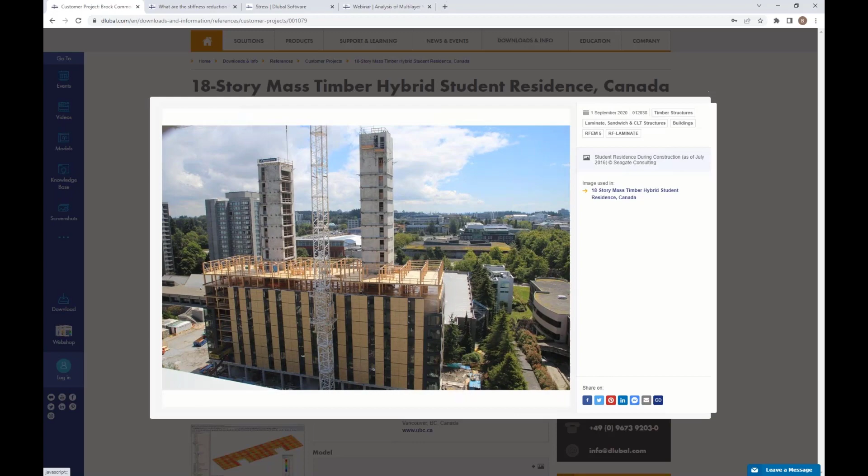Thank you. What I want to show you today is actually separated into two smaller models. The first one is based on a customer project, which we will just model from scratch and design. It's the Brock Commons building, 18 stories and 53 meters high, standing in Vancouver, Canada. It's a perfect structure, and we will design one story of it.

Therefore, we directly go into our new program, RFEM 6, and will create a new position. I don't want to lose too many words about how you arrange models, and we are not doing a theoretical introduction into the design process, but a few words about how the general model is going to be defined and how you can assign it. First of all, we give it a name: webinar CLT 2D plate, for example.

In the second register, we are actually activating the add-ons, or what we want to design. So what do we need to do today? Of course, we want to define a CLT floor. For generating the stiffness, you would need the add-on multi-layer surfaces - it's written in brackets, e.g. laminate and CLT. So it's not only for timber or CLT, it can also be used for glass and several other products like carbon fibers and so on. Wherever you have several layers of material, of any kind, lying one over the other and generating a stiffness from it, this is the add-on you would need in our portfolio.

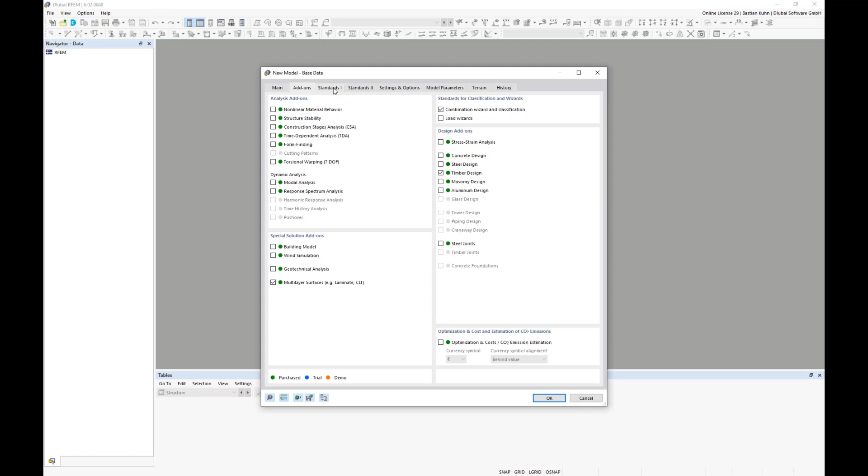We are not concentrating on load design or creation, that's why we switched that off and jump to the third register, standards, as we want to design for timber, for CLT, and we are in Germany here. I'm using the Eurocode with the timber annex. In case I were designing in America, Canada, Switzerland, or elsewhere, I would choose the other standard. I can keep the global national annex, but of course for each country in Europe there are several national annexes you can choose.

In general, what you are doing with these annexes is that you can assign deformation coefficients, the kdef, there. So in this case, I'm designing in moisture class 1 and therefore use kdef 0.6, which is already predefined. But in case I want to use another value, I can for sure choose that there. Okay, timber design, it's the same as what counts for the load generation, and therefore we can skip that now from the explanation.

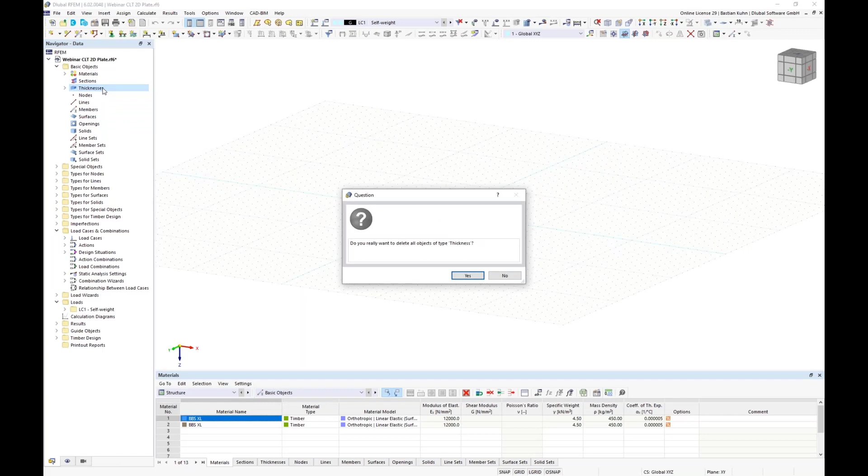Okay, then we are in the screen of RFEM 6 and directly will define the new thickness. Sorry, I wanted to start with a blank sheet, therefore I wanted to delete thickness and material because I want to show you directly what you have to do. So if you go in here and want to define a surface, you at first create a new thickness type here, and because I have activated the add-on Multilayer Surfaces, you have here a thickness type Layers, which we will be using here today.

So when you choose that, you see that thickness and so on can no longer be introduced in here, but a second register is opened where you can define layers. There you can also directly go to the material database and choose an orthotropic material model. And if you go to the library, you can see that we already have a few producers there. So there's Binderholz, Haslacher, KLH, Züblin with the Leno itself, Stora Enso, and so on.

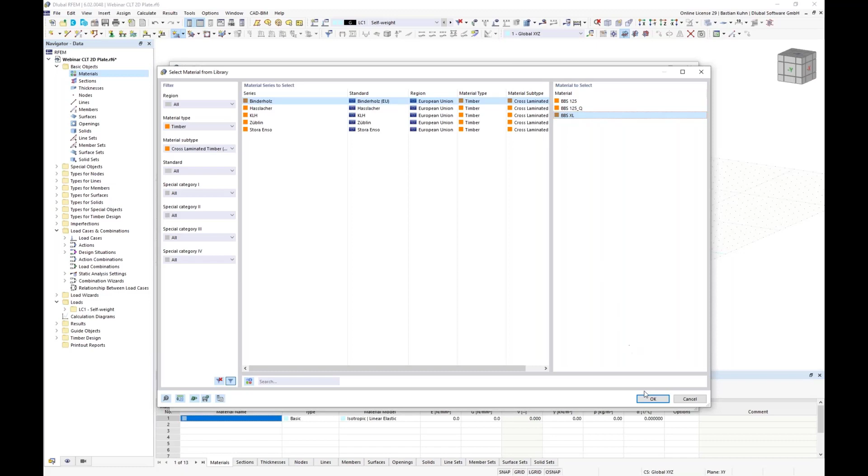I will be choosing directly Binderholz with the BBS XL because I want to show you what exactly this is doing in here, because now I've chosen this material and it took directly from the database the correct strengths which the producer, in this example Binderholz, gave us. Especially the strengths for the shear stress verifications are something where you do not have any values from the standard. So if I had chosen an ordinary C24 material, I would not even have this strength here and would have to assign them.

Okay, so now this is predefined. It also made a stiffness of 12,000 Newton per square millimeter in the X direction, and in the Y direction it is 0. I said it already, we cannot give you today a theoretical introduction into our design. Therefore, during the modeling process, I will show you our homepage where you can take a look into the manual, and we also offer special trainings for that. But now, in X direction, it's 12,000 Newton per square millimeter, and in Y direction, for one layer, we have a value of 0.

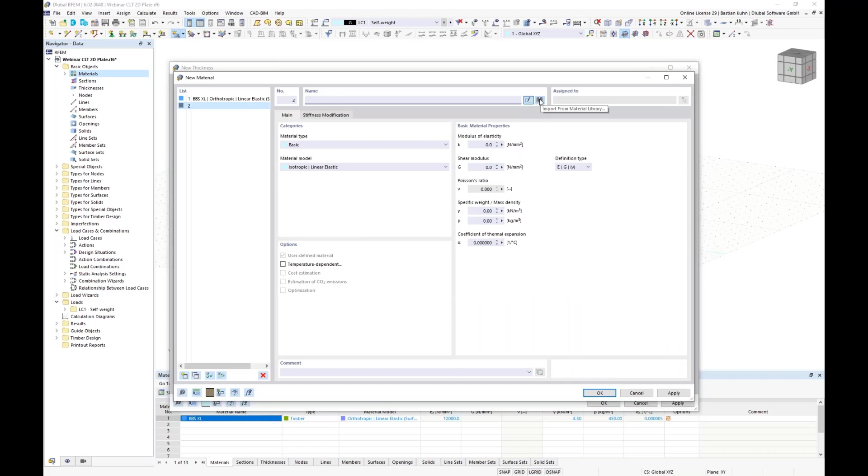For graphical reasons, I'm now choosing the same material once again. So go directly back to the database, choose this material here as well, and give it a red color, because I like the difference between red and blue. Here I'm using exactly the same material model. There's no difference in between, so the material values are the same. As I said, it's just for graphical reasons. You see now that it's red, and in the rendered model afterwards it will also be red and blue. Just a personal point.

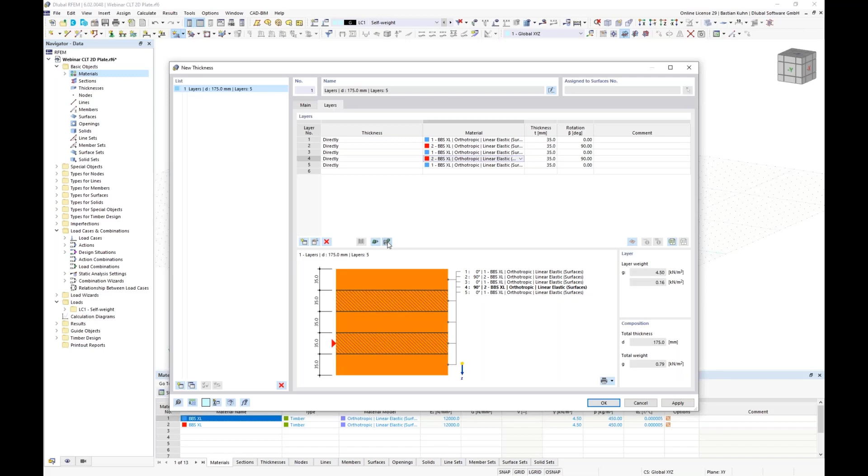You can also save this setup to a database. So of course, we could use it for the second model that we want to create today. Therefore, we name it now Webinar CLT or whatever name you want. And then later on, we can load it from a template in here.

What I missed now is the stiffness reduction, because when we are calculating with the shear stiff transfer of the load, we have to reduce the shear stiffness in some parts. So the drilling stiffness K33 and also the in-plane shear stiffness K88. I will also show you a link later on where this is described in more detail.

Here on the bottom of the third register that has now opened, I have options especially for CLT design. I could use here glue at narrow sides. The reason for this is that most of the producers are gluing their CLT on the narrow sides, at least for the production process. They do not assign it for the stiffness, because the EY, you saw it, is still 0 there, but they are using a little bit higher shear strengths. But stiffness, because of cracks in the boards, they are not increasing it or regarding it.

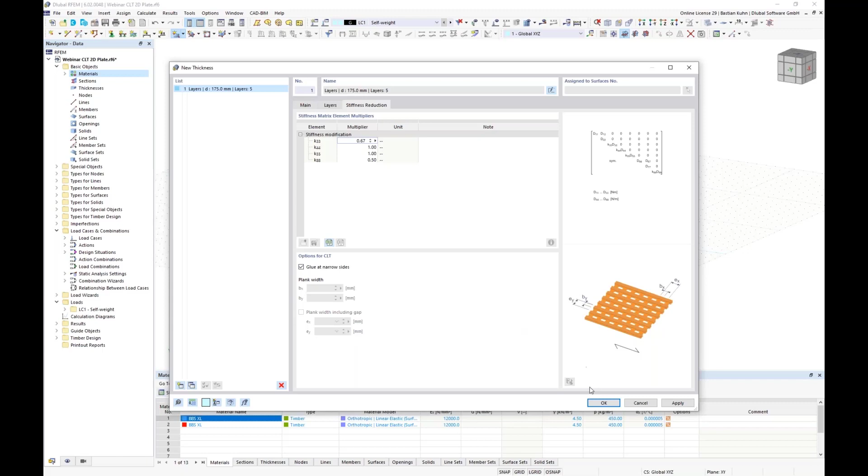So therefore, in the first model, I will glue it at the narrow sides, and in the second model, I will show you the difference, what happens when you switch it on or off. But for now, we're using it glued. Say okay, and one more time okay, and now we are in the screen.

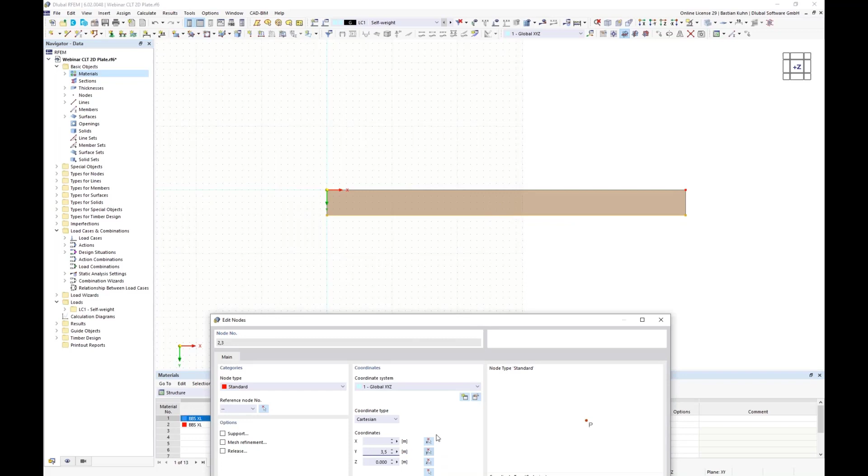Use the origin of 0, 0, and then we want a width of 55 meters, and the height of each plate should be 3.5 meters. I know that it's not possible to produce a 55 meter long board, but there are options to calculate such things also stiff for the rotation. And I want to have several boards with a width of 3.5 meters in the Y direction, and that's where the higher force should be regarded.

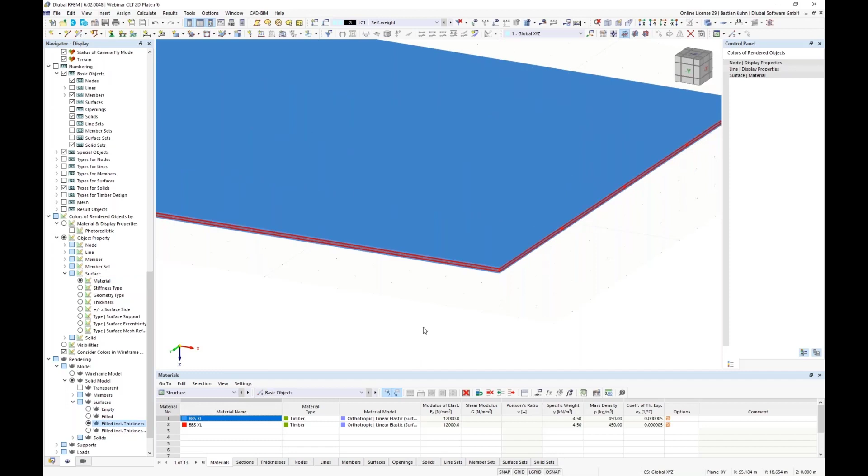I'm using the dynamical size of the grid and will now copy the system 3 times into the Y direction with a value of 3.5 meters. So then it's here, and I want to show you now why I used the rendering. We switch to the view screen and say surface. Now you cannot see it. Sorry, I have to go to model, solid model, surface, filled including thickness. And now you can see each layer, and it becomes much better visible how the layers are oriented.

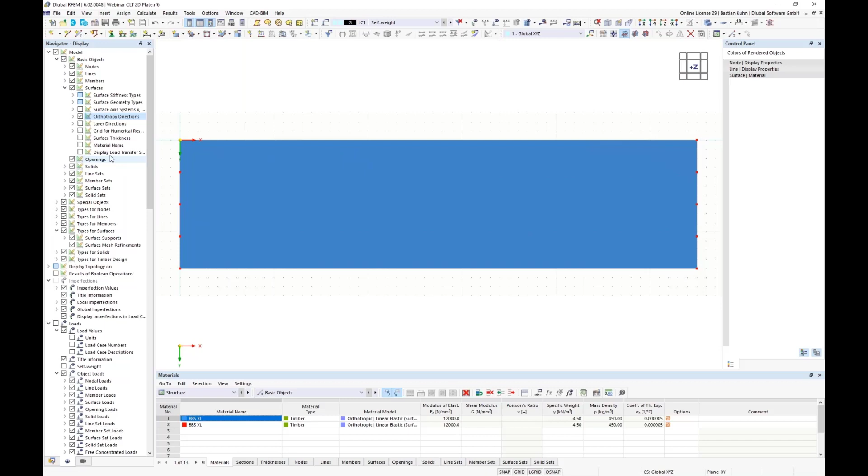We have implemented in the surfaces so-called orthotropy directions, because the material model that I explained is an orthotropic material. But if you switch that on, you see nothing happening. Why is it like this? Because now the layers are oriented in 0 and 90 degrees. If you want to see how they are oriented, first you have to switch off the rendering, but then you can see how they are oriented.

And if you switch the indices on, you see that the layers 1, 3, and 5 are oriented into X direction, and the layers 2 and 4 are oriented in the Y direction. So my main stiffness is in global X direction. That is what is important. Okay, so that's the model. I can now switch that off and divide these 2 lines by 3 nodes, because these are going to be my stiffening cores in the center. They are made from concrete, and that's how it was assembled in the building in 2017.

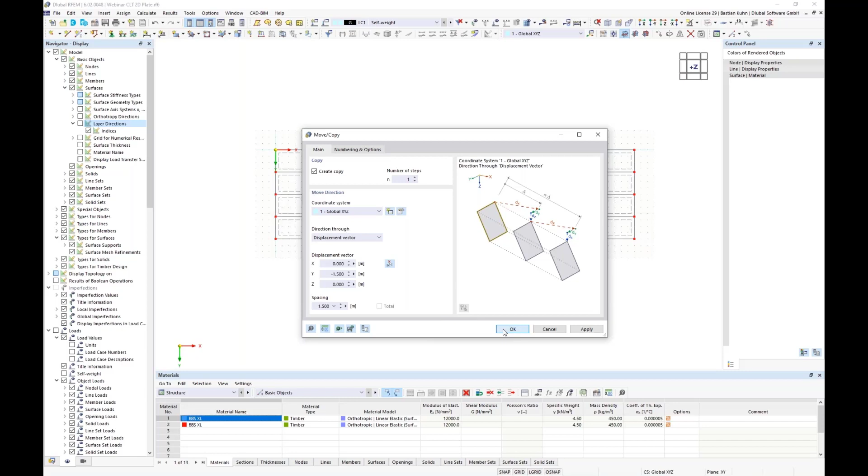They have a width of 6 meters, and the second core is at an origin of, let me take a look, 37 meters. I'm not using the exact values from the building, but just to have it close to the structure. These 3 nodes I will copy 1 time in minus 1.5 meters. Say okay, and then I will draw a few lines here and there. And this one I will copy via drag and drop onto the right side. I will connect the lines, and then it's okay.

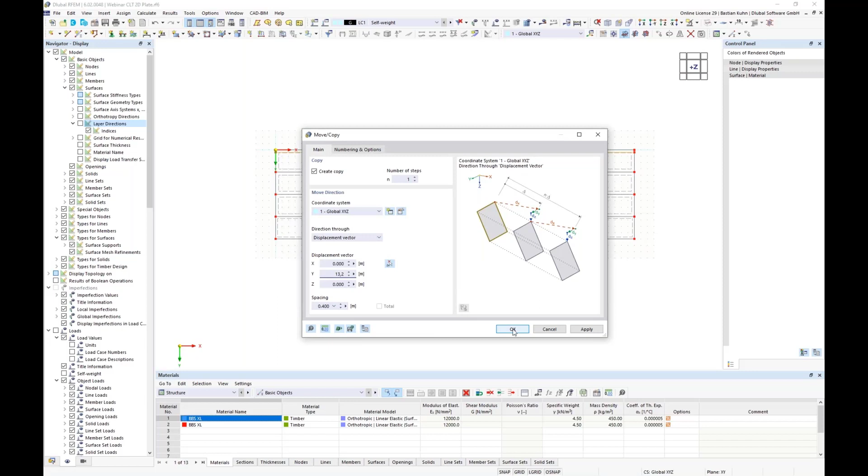And then a very nice function is, if you right click in here, you can divide the surfaces by integrating lines, and now you can just delete the surfaces which we do not need. The facade is running on the outside of the structure, and the supports are lying on the inside. Therefore, we are copying the outer line now by 0.4 meters in the Y direction, and this one also on 13.2 meters, also with 1 copy.

I will take the inner lines, and before I do that, I have to look for the origin of these lines, which also works via the display navigator lines, line orientation. And now you see that this line is not in the same orientation. Therefore, I will use reverse line orientation in here.

And now that I'm just in this dialog, I can also take a look if my line axis system is similar. Of course, now that I changed it, it is important later on in order to define the slip in between surface number 1, 2, and so on. I will explain that when I'm doing that. But first of all, for the supports, we want to divide the lines in here.

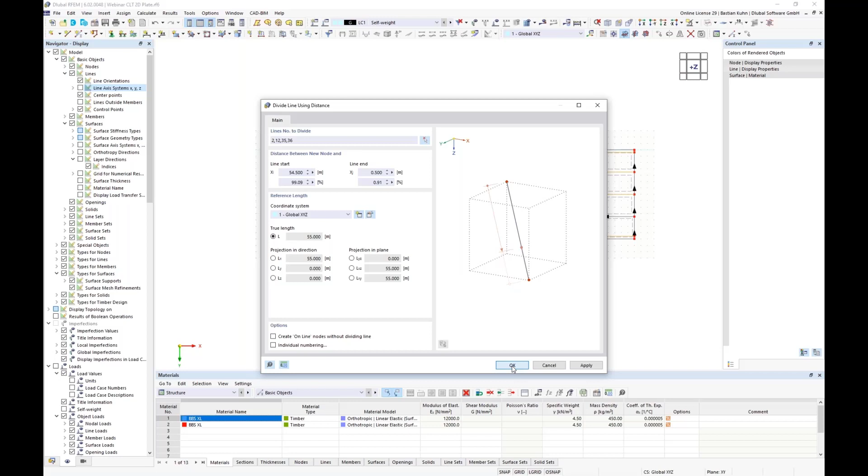Say, okay, divide line distance from the end is 50 centimeters. Still forgot one. Sorry for that. Divide line with a distance at the end 0.5. Okay, it's not happening again because I have to do it here as well. So divide distance and then at the start also 50 centimeters.

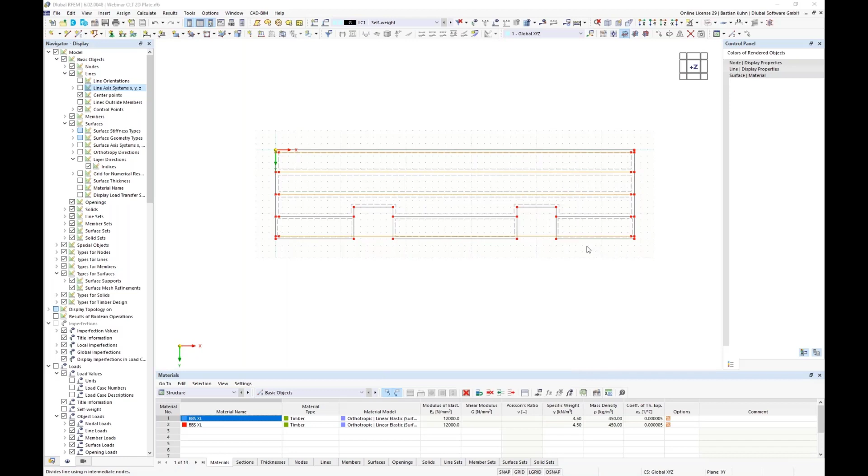Okay, now this is how the supports will be running, and of course those are not enough supports. We need more columns in the structure. We have now also to divide the line by n intermediate nodes, and what's also a very nice function in RFEM 6, or which has been improved compared to RFEM 5, is that you can now create nodes on a line without dividing it. You could do that in RFEM 5 as well. That's not completely true what I'm saying here, but there are more options for it right now.

So I'm copying it 11 times, I think. Yep. 11 times without dividing it. Yeah, that's all. Sorry. Okay. Now the structure is nearly there. I have to just interconnect that. Actually, that's not really necessary. I could also have left it like this.

And for the inner line in here, of course, you also want to have the nodes copied to there. The shift function is deselecting what you do not want to copy. And now I'm doing one copy of a value of minus 3.1 meters, and now they are there.

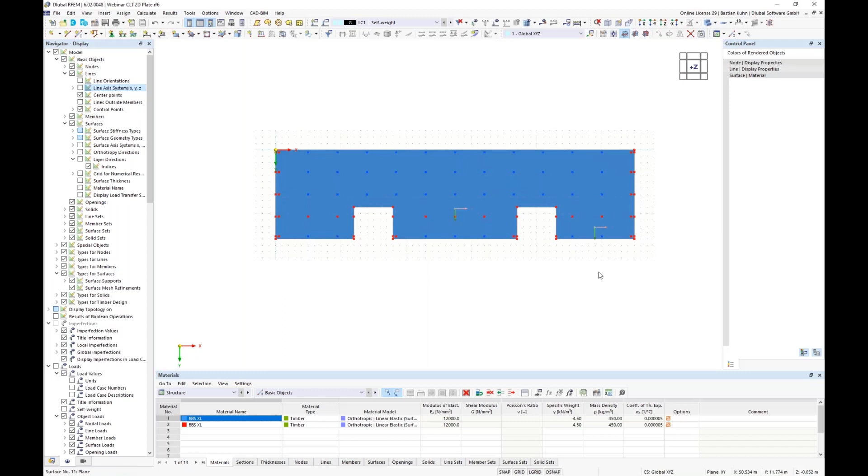Okay, now I introduced it already several times, and the question is, well, how can I now define a slip in between this structure in here? And that would be done with a line hinge. A line hinge is also improved very well in RFEM 6. If you remember RFEM 5, you had to do a lot of line hinges on such a structure, and now it is possible to do it only for one object.

But still, you would have to define a slip here in UX and UY direction, and therefore it's the first time for this presentation I want to jump out a little bit and show you a very, very simple calculation in Excel. I just want you to know how I get this value and not grab it from heaven or somewhere. I'm calculating a slip in between the two plates in here based on some very simple equations.

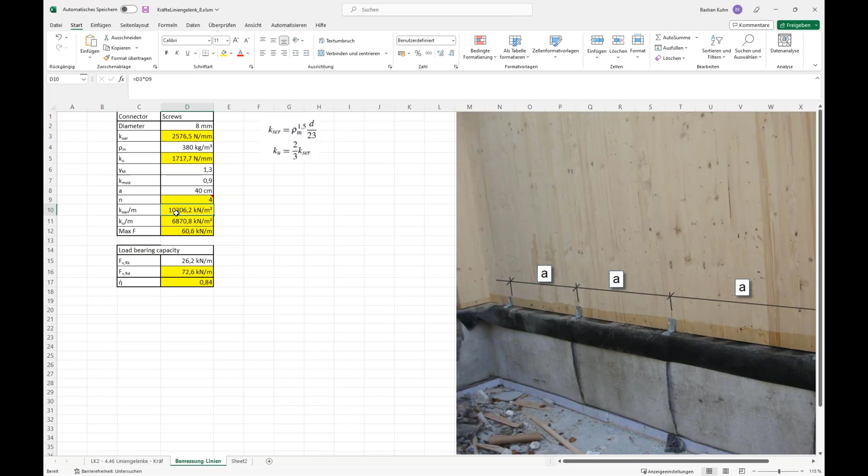Okay, sorry for this little excursion, but, as I said, I wanted not just to present it as heaven sent. And if you have this value for the slip modulus, you can go inside our global parameters and name it, in this case, K ser. And in unit groups, you already have a lot of values that you could use. And we want to have line spring constant, and this gives you this value in here. Okay, and insert, and now it's there.

So that is now not really a big step, because if you only have this, what does it bring you? Because now you design the structure and you find out, okay, 3 connectors, that's not enough. I need to have 4. I need to have it more stiff. Then you always have to jump inside here and define it. And also for your documentation, the printout report, you have like nothing.

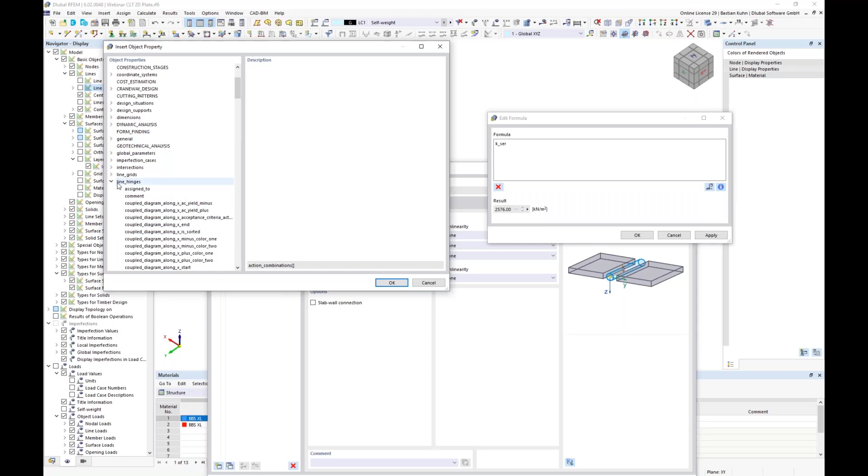So how can you improve that? If you go to this info box in here, you see there's the option to insert object properties. And there are now also very, very many options that you can do. But we just want the simplest one of it, line hinges and comment. Say okay. And you see right now, it's a simple JavaScript function that I'm using in here.

But it has an intelligence behind, because it already tells me, okay, what you're doing here is an error. Something is wrong. And what is wrong? Okay, I need to tell the software what object I want to assign the comment to. So in this case, that's the object 1. I just have to type it here. You see it here in the list on the left side. And I forgot the addition in here. So, and now you see, well, the value is still 0, but I have something in here.

For my documentation, I'm using this little slice in here. That's just something you need to Google and will find out directly. So if you say, okay, nothing changed, that's a little bit annoying. Why is it not sending the value that I want? Because you have to define it here in the comment. And if you say 3 connectors, or you can also say 3 screws or whatever it is, first of all, this comment is taken to the printout report. I will show you after we did the design.

And now if you find out during the process, okay, 3 is not enough, I need to do 4, or it just has to be stiffer, you can just define it here, and it's changed in real time. Well, of course, right now I know 3 is more than enough for this structure, because the horizontal load that I'm assigning here today is not that big. But that's something you will always find out during the design process.

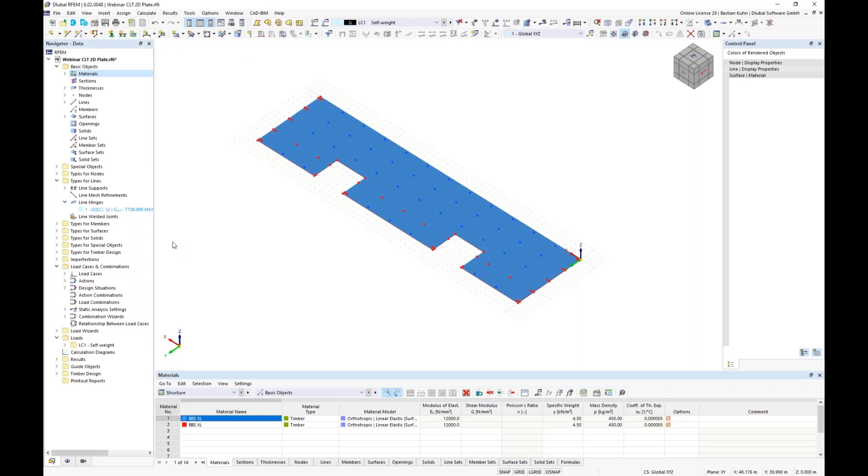If you jump into types for lines, line hinge, it gives me the opportunity to show you the advantage of it, because in RFEM 5, you would now have to open the dialog once again and also define the line hinge once again. But as this is an object now here, I do not have to do that, and can now do it correctly and choose the surface and assign it to this line, this line, this line. So wherever I'm assigning it, I'm defining a slip. So in between this plate and this plate a slip is defined, and this plate and this plate.

And now a slip is missing between this plate and this plate. And once again, back in RFEM 5, you would have to define the whole stuff once again. But in here, I just can click there, and it's absolutely no deal. So that's, to me, a big, big advantage of the new workflow.

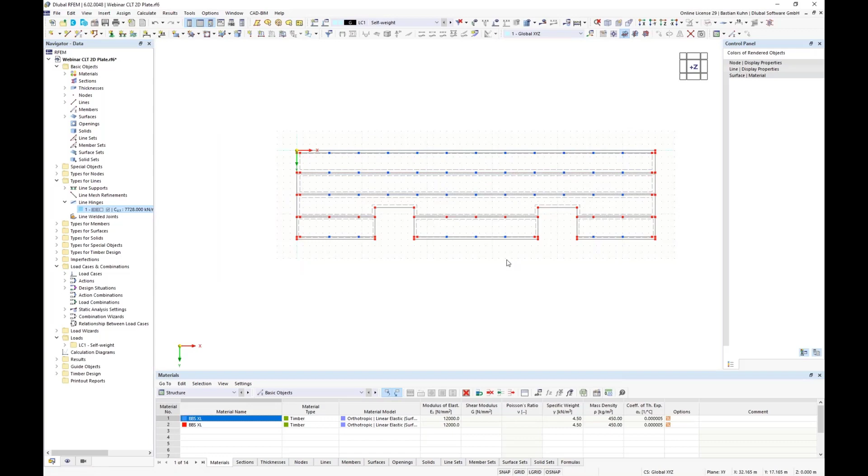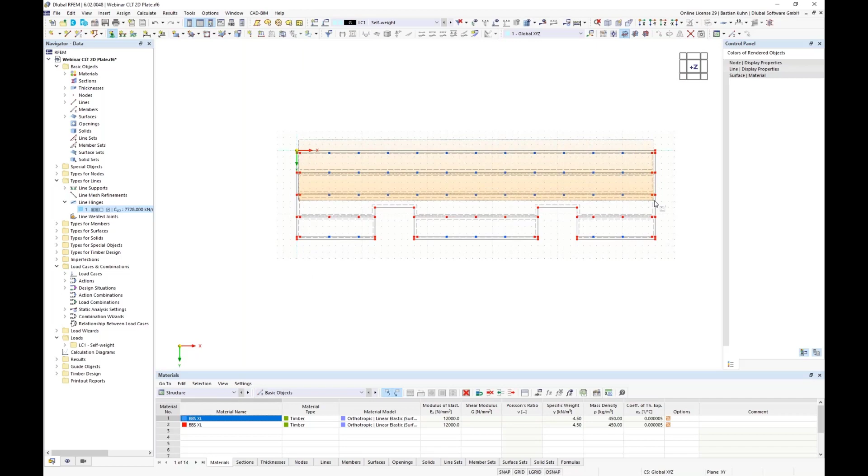Okay, it's a little bit small. Maybe I will just increase the size a little bit just to see it in here, and go actually in Z direction again. That's now defined, and I can define the supports that represent the columns underneath. They are very simple. They are just using force in UZ direction and nothing else. Say okay, and assign it in here and in there and there and there.

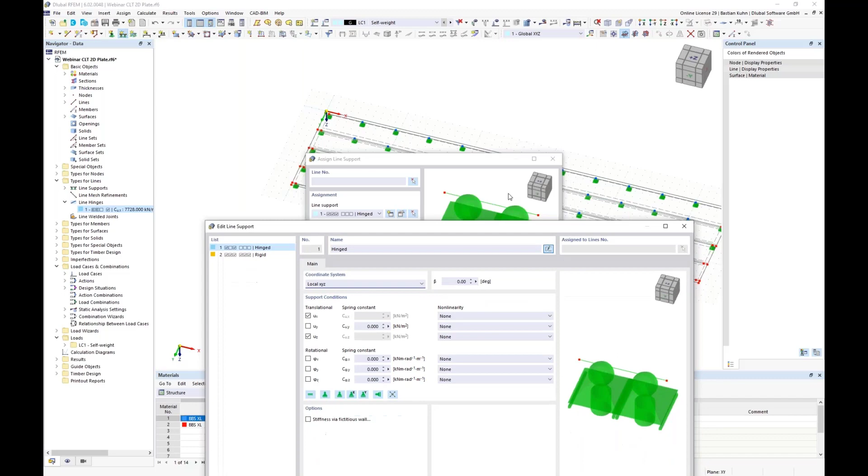That's also, to me at least, a little bit small, and we can maybe just increase it a little bit. Okay. What else do we need? In this case, when there's a horizontal force, it will just move away, and we need to define the line supports from the core, and that would work via line supports, define or edit the existing ones, and we use actually the same intelligence here, but for local systems. And because we want the force just to act in the longitudinal direction of the line, I will just release UX, or just give the slip to UX.

I will complete the release. That's how I want to do it. And then I'm using the same like before, using K ser. Do not make the mistake from before. And now if you go in here, it's obviously not line hinge what we want to do now, but line supports. And there's also just the simplest function comment.

You see in here, you can do a whole bunch of stuff with this. So you can have diagrams with forces coming from other directions than UX and so on. That's all included in here. But yeah, once again, we use the simplest one. So with line support 1 point, same function like before, 0.1 and this, and no error, and then we just

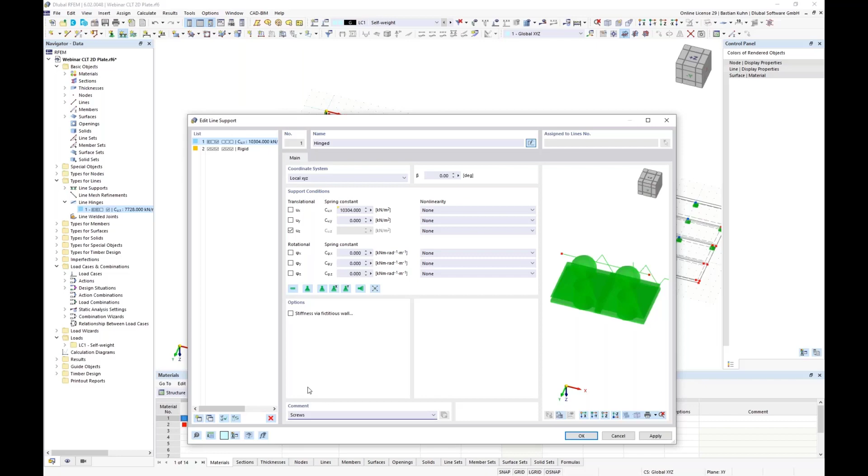type it here, say, what did we write? I forgot it. 3 screws, I think. And now we have it here. Yeah, works the same way. Yeah, trust me, it is like this. All right, 3, this. Okay. But we need to assign it to the lines. That I should not forget.

So where do we want it? There, and there. And of course there, and there. So the model is now already there. Maybe we want to have some dimensions for it as well, just to have it a little bit

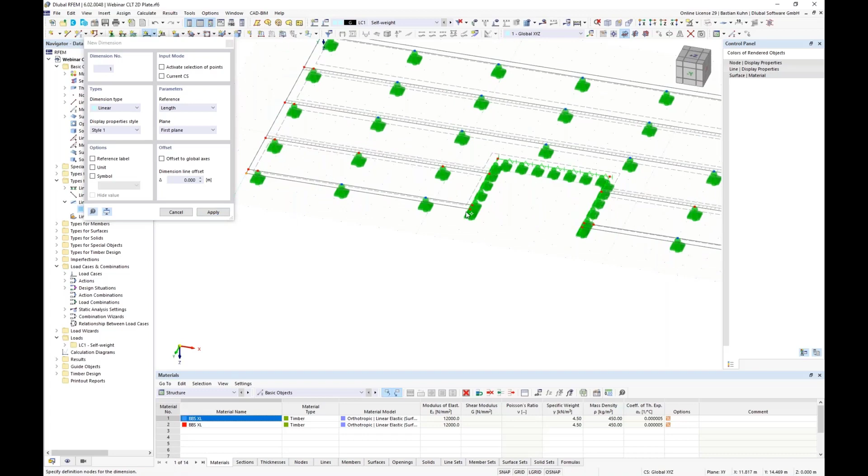nicer. And maybe we are actually directly starting the printout report, because there's something quite nice in the new RFEM 6 that I want to show you once we have the dimensioning ready. So okay, sorry, maybe you would do it differently when you are making the design of it, but for this I think it is now all right.

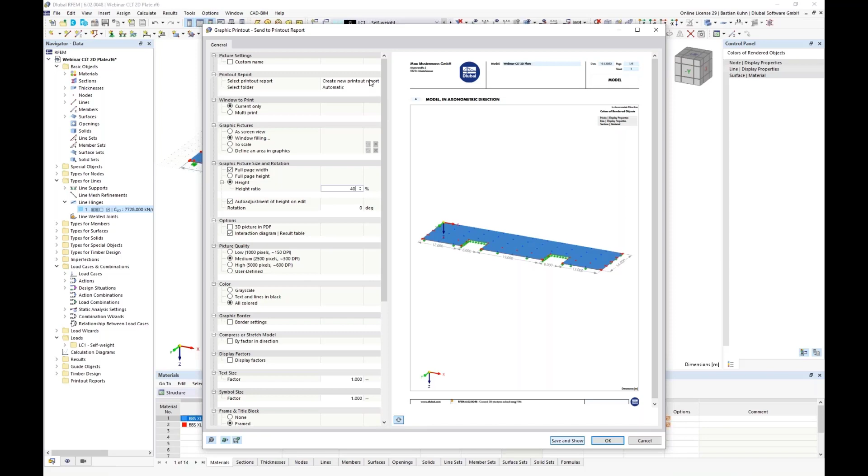And we print this graphic to the printout report, because in RFEM 6 it is possible to have the printout report opened when you are working on the model. And we will do that. We will maybe use it window filling, and maybe not, we take maybe 40% of the height. Save and show. I did not choose a printout report. Actually, I should have selected the printout report in here.

Here. So, and it works in the same way like the material database before. You have here templates, what you can choose. And I actually have created one for today's webinar especially, where I selected and deselected a whole bunch of stuff. I think we will now assign it and then go back to the design process.

All right, it's generating it. Gives me time to drink coffee, a small one. Okay, now it's there.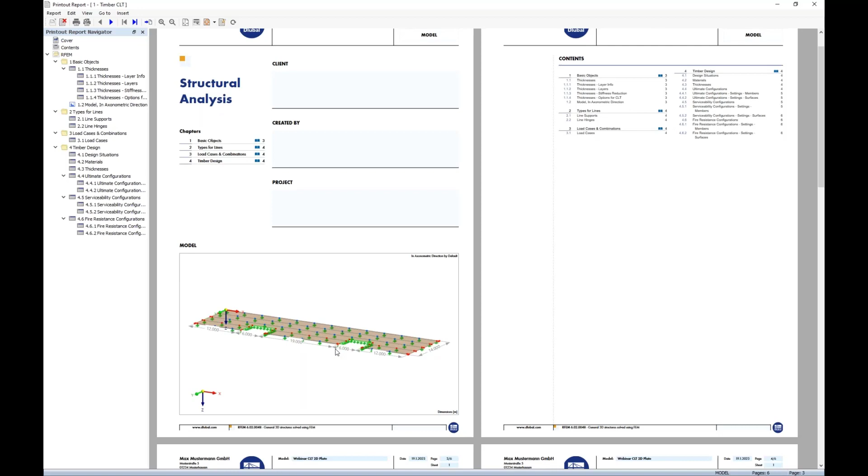Actually, I could have opened it, but we're not doing a webinar about the printout report today, but of course I want to show you what kind of points you can implement in there for CLT or for timber design in general. Okay, so here's now the model, and that's it so far. And we go back to the design process and introduce the load. Deactivate all dimensions, because I don't want to see them any longer.

And introduce the load. So first of all, we're doing a horizontal force just to have a deformation in Y direction of 1 kilonewton per meter. If you have looked at the building, it is standing in one of the highest earthquake areas around the world, so there's probably more force than 1 kilonewton per meter. Also from wind, there's probably more force. But yeah, just maybe we are in the ground floor here and just have some small force.

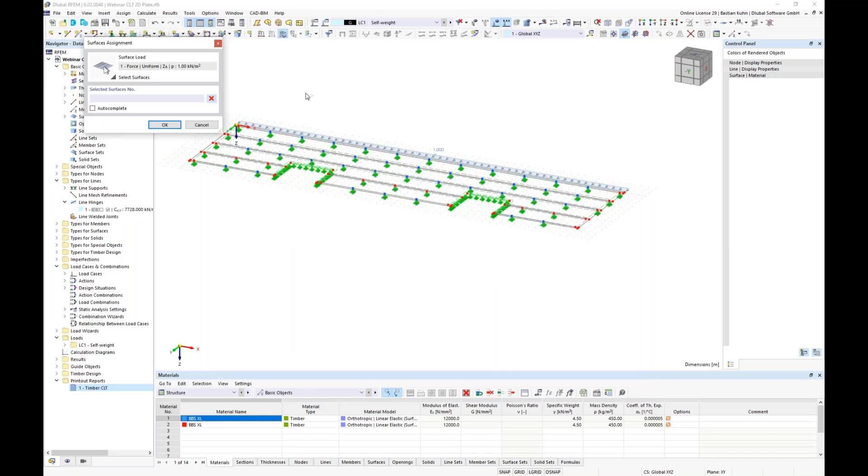Yeah, we also take a small value in load case 1 from self-weight and say okay, we have that here. And now we define for each plate a live load. So this will be 5 times. Say okay, and now also one of the advantages if you compare it with RFEM 5, and yeah, I worked long years with RFEM 5, I'm still comparing it. But if you are new, you do not have to compare it.

In RFEM 5, you would have to define the surface on load case 2, say okay, leave the dialog, and then choose the second, or in this case the third load case, assign it there, and so on. This is, as you see in here, also no longer necessary. All right. And last but not least, this one.

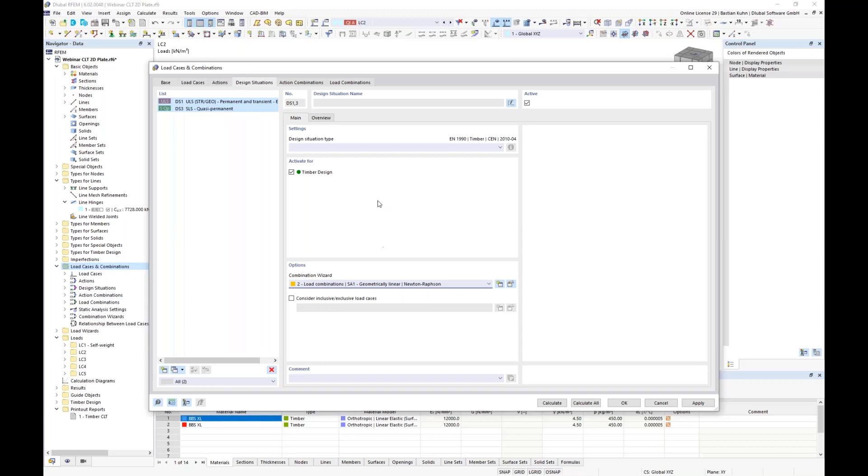Okay, so we can now also control if we did that all correctly. It's all correctly. And go into the load cases and combinations. We're choosing timber here as a standard group, and for the design situation I would just use quasi-permanent. The other ones I'm not interested in, and I'm calculating according to first order theory and automatically creating my combinations for that.

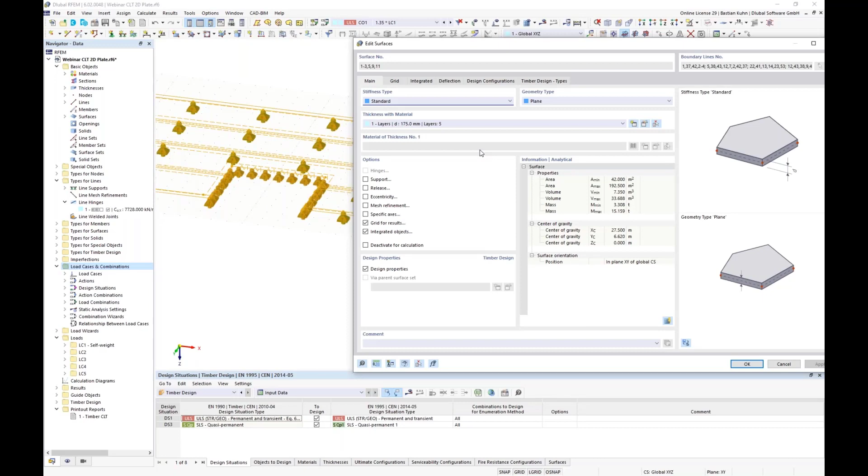And now they are here, say okay. Now I could have started with the design in the add-on timber design because I have activated that in the basic data, but I have to show you the objects that you can or should take care of. If you compare that with RFEM 5, there you have the design add-ons Laminate and Timber Pro, and all the things you defined in these add-ons are now moved in RFEM 6 into the objects. In this case, we are designing surfaces, so you define it in the surface.

First of all, if you look for the deflection, you can choose deformed or undeformed system, but that's not what I'm up to. I want to show you a plate is always a little bit problematic when it comes to having no clear deformation, where you should consider a reference length too.

So the distance between this support here on my node and this is actually 4.5 meters, if you remember what I did by copying them. But how do you want to regard it with this other side? Therefore I choose 5 meters because I'm choosing the difference between this point here, and you cannot see it now, but the other point there. So to me, that is now on the safe side. And if deformation gives me problems, I anyway would have to do a more detailed deflection analysis. Okay, that's, I hope, explaining it a little bit.

Ultimate limit state configurations. We have a combination for ultimate limit state configuration, and therefore, of course, we also have to look for the objects. The first two registers are for members, and the third one is for surfaces.

Maybe most interesting for the designer is that now for CLT, it's also possible to consider a system strength factor. So that would be possible in here, and then you could increase it to 1.1, for example. The other ones are not important for surfaces, and therefore I'm not explaining them.

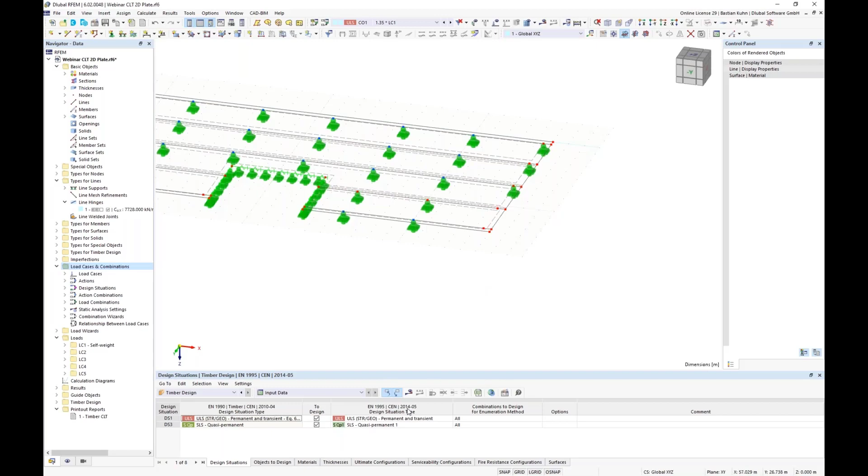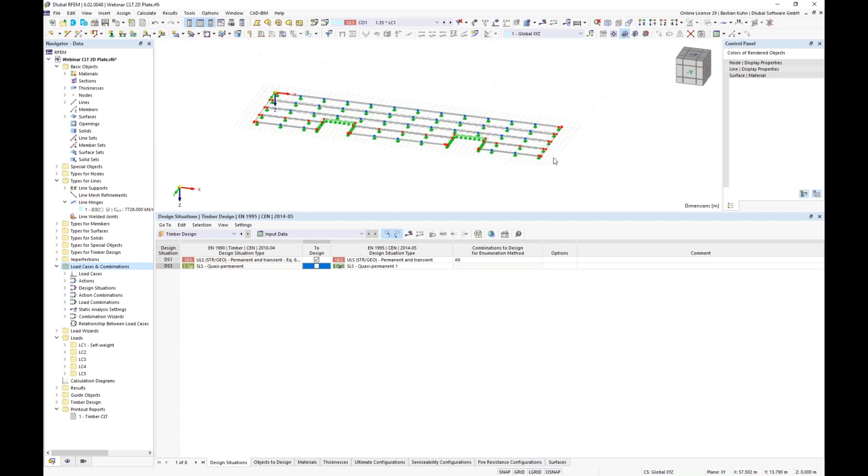Okay, so that's now done. Enough explanation. In the first step, I can also just calculate the ultimate limit state, because serviceability state I could design when I'm sure that everything else is working correctly. Actually, let's see what I missed here - there's a support missing there and also there. Yeah, maybe do some checking before we start, but the rest looks great.

And I will start the design process and will give you small explanations about how the stiffness is generated and what is actually done in there. That's what I wanted to show you right away.

Okay, that's opening now on the other screen. Ta-ta! Hold on. Oh, that's confusing me. I hope you see it now. Can you see it now?

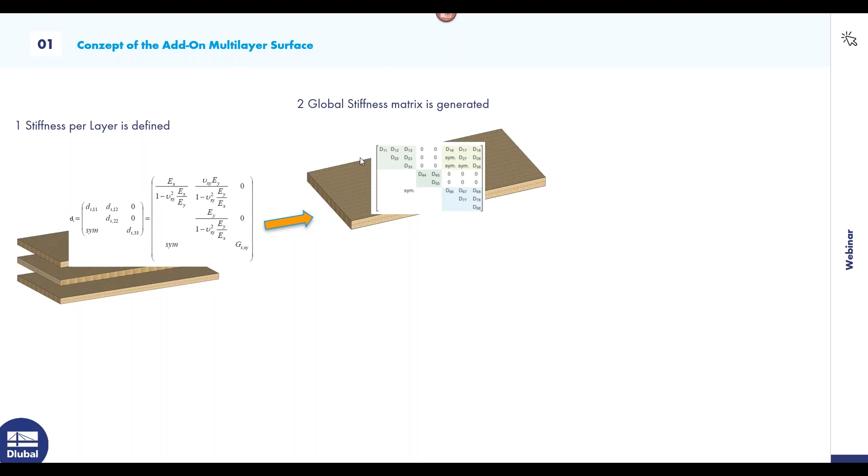If you remember how we introduced the layers, just a small theoretical explanation: we defined a stiffness of EX and EY, a Poisson's ratio, and a shear modulus, and that is now defined in every layer. From each layer, we calculate a global stiffness matrix, which is exported into RFEM. In RFEM, we calculate deformations, stresses, and inner forces on one plate, not on the whole layers, but on one plate, and these inner forces are then transferred into every layer. That's the theory behind that.

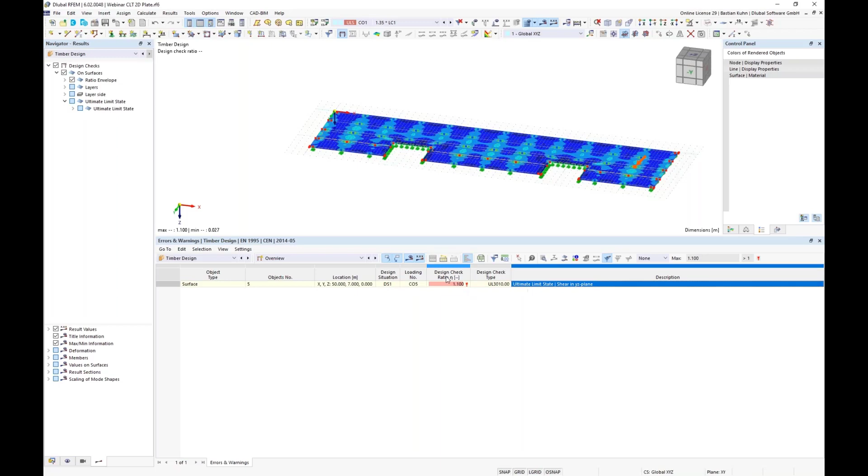Okay, so you see we have now an overloading, which is not the desired behavior because we want to be green and we want to be smaller than 1. But if you look into the details, you can see that the overloading is just in a very small spot here. I can actually switch off the nodal supports.

They are not necessary to me here anymore. Okay, and if you realize that in reality there's not a needle standing underneath this point, but a column with a diameter of, let's say, 40 centimeters or something else, it's obvious that you should not take the force at this spot, but somewhere outside. And I will show you how to do that.

In the literature, you will find this described as a so-called punch-through verification. But before we do that, we go and take a look first into the verification itself. Via double click, we go into the details of it. You see now that in RFEM 6 we have quite nice formulas or equations shown here.

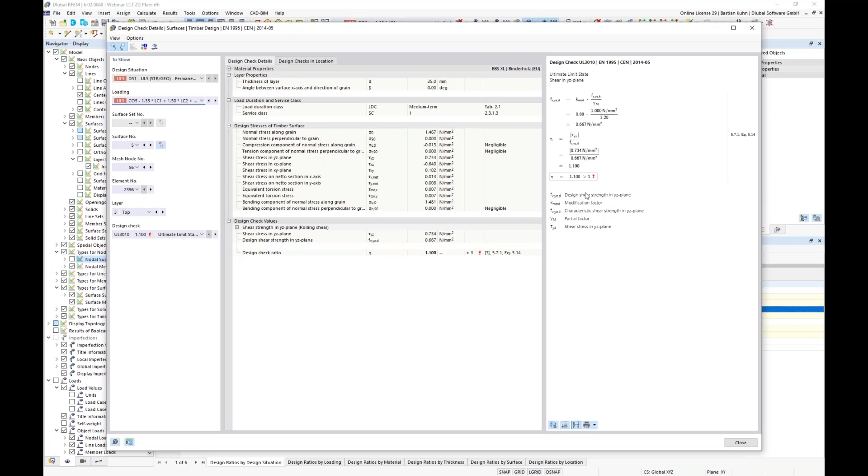They are also filled with values, so you have the shear strength shown here. You have the option to take a look at the ratio over the section itself, or you see here now the several layers that we have defined. You can switch it to stress and take a look into it. So sigma x, the bending stress, you see that where you have high stiffness and high loading, you have a higher stress.

So that can all be compared here. And of course we also want to take a look at the shear stress, and they are usually in the center of your section. That's the same for beams, counts for plates as well.

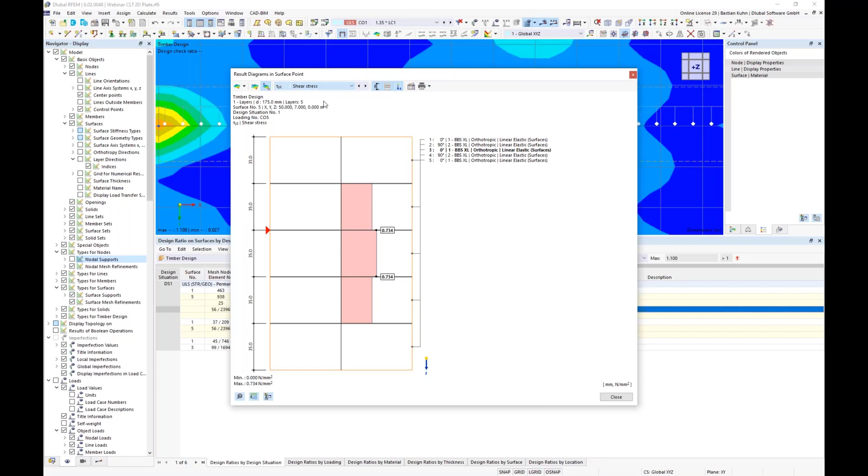Okay, you could also print such things, no, maybe not this one, but maybe this one into the printout report. It's opened on the back, so we can just take it like this, maybe a smaller height. Actually that's okay, so we just say okay, and then it's already in the printout report, and I do not have to take a look at that. We will do that later on. Say close, or I could have also left it open, it does not really matter.

What else is new and possible, and much nicer than it was in RFEM 5? If you go to the result navigator here, you can see that first of all you have now a ratio envelope of all stresses that are here. You have them here and can print them to the protocol directly, or use them for your analysis as well.

You can separate between several stresses, and also between several layer sides, for example top, middle, and bottom. Here I can choose the layer. So for shear, you would probably use one of the inner ones, and for bending, you would probably use the outer ones. That's the first nice function.

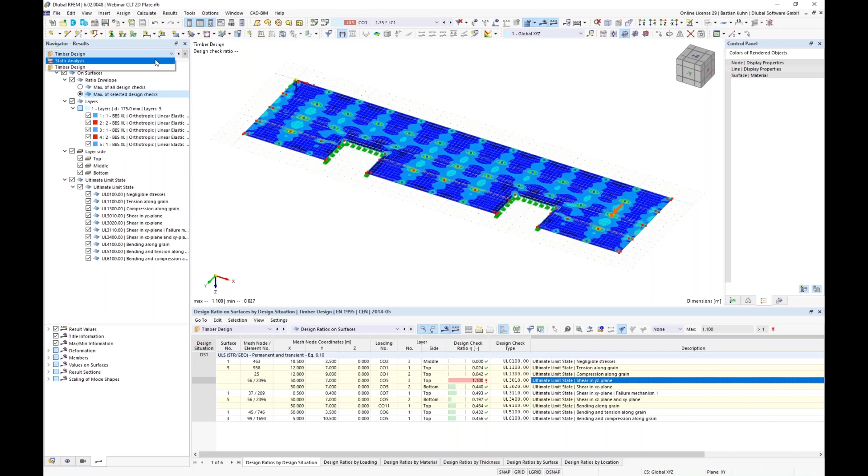If we jump back to the static analysis itself, for the connection design, we have, first of all, when you go to the static analysis, you can see the global deformation and compare it just to get a feeling of what's going on here. You could also here for each layer take a look at your stresses and also your strains. That's for some cases quite interesting, I think.

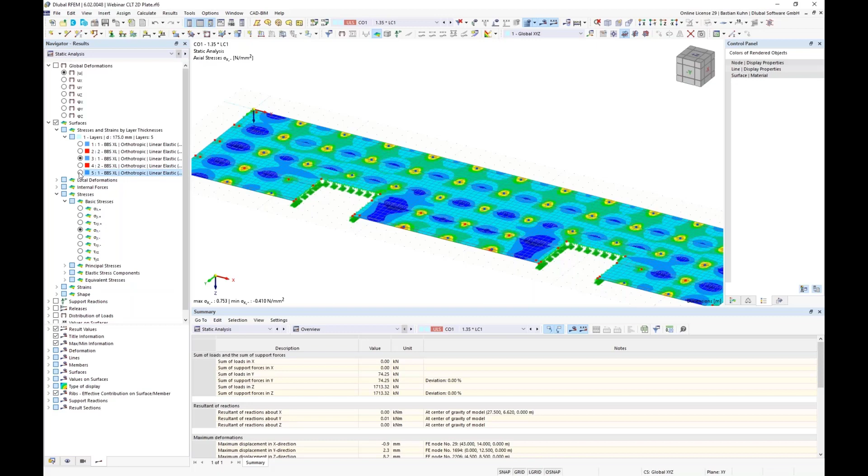If you compare sigma x on the negative side of the surface, you see there is a value on the top of 3.8 here as a maximum, and if you go to the middle, it's actually quite low. If you go to the bottom of your section and choose sigma x on the positive side, it gives you the same value as you had for the top side. So that's also something you could use for your analysis.

Going on with what I said, first of all we want to look at static analysis for the connection design, and therefore we have options here. First of all, the more simple verification of the connection is in the line support, because there we just have a slip defined in x direction. So this is the force you need to connect with your connectors in the x direction, or in the longitudinal direction of your line.

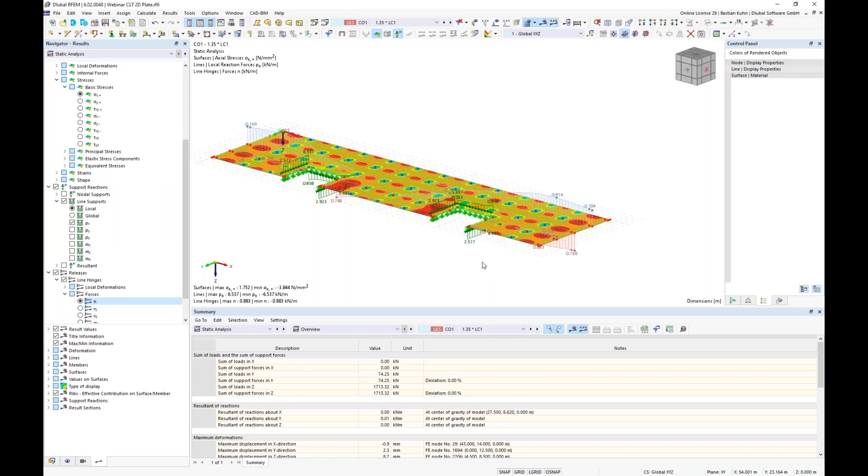But also for the line hinge, you can take a look at the force here. And this is now also the force that you have to assign between this panel and this panel.

Now let's take a look where the maximum value is. Well, it doesn't matter, it is here. It's quite a smooth value, and you do not have any singularity effect in the connection itself. But nevertheless, from time to time, you will face this problem.

And therefore, here in the result diagram, maybe we will switch to one of the bigger ratios. In the result diagram, you have the option to smooth these values as well. So you can also say force, normal force. And if you look now for the values here, you might say, okay, 10 meters, 12 meters, that's where I would average, or where I'd be able to average my results.

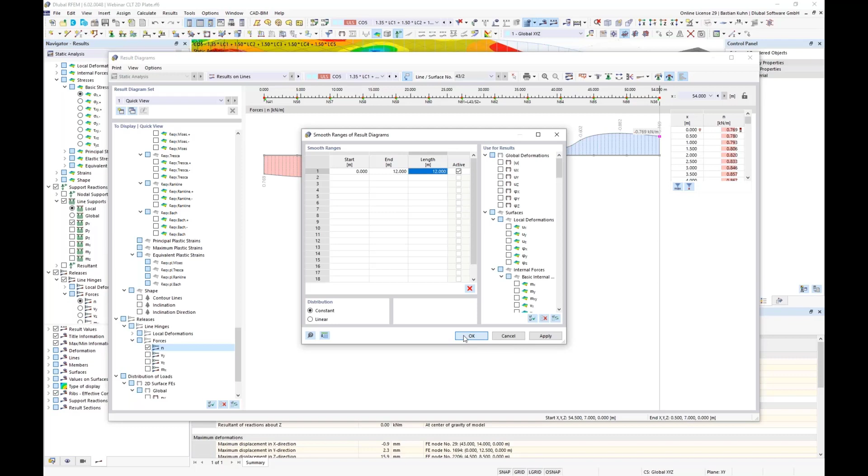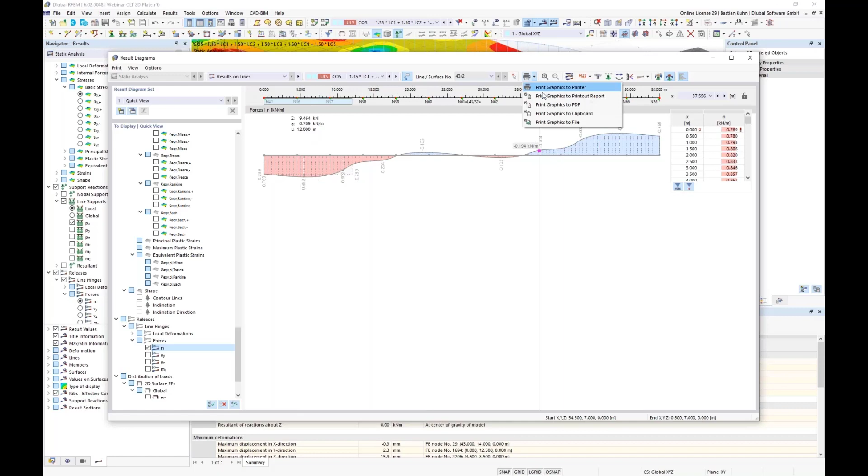So also this is probably something we want to have in the printout report. So we will say, okay, maybe we will not use the full height, but something like this should be in there. And we also say okay, and leave the dialog.

Also, this result diagram I would not need to close. So if you work with two screens, sadly in our presentation tool we do not have the option to show two screens at the same time. But yeah, this also does not need to be closed.

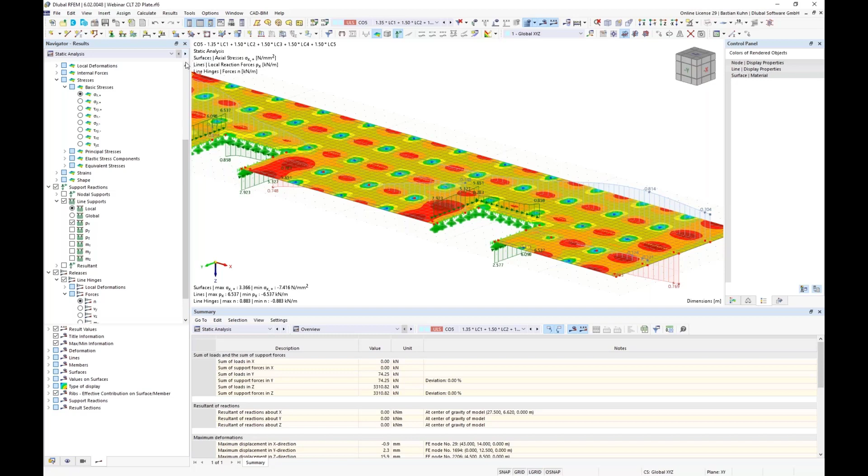Okay, but back to the design of the timber. So when you look for that, we still have the overloading here. How can you get rid of that? It's actually similar to what I showed you with the smoothing of the result diagrams.

It's just called differently. It's called insert special object, surface results adjustment. This is just for smoothing your result. So now if we say we have a column of a width or diameter of 40 centimeters, it's definitely possible to use a dimension of 60 centimeters. I will show you the reason right away.

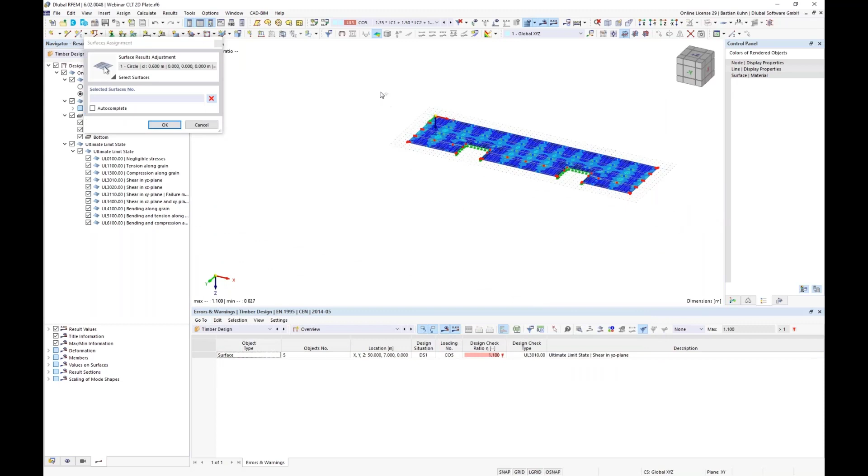I'm choosing all surfaces here, and I will define it on the first support here and press OK. So you see, I have not shown the supports now because I've switched them off, but trust me, they are there.

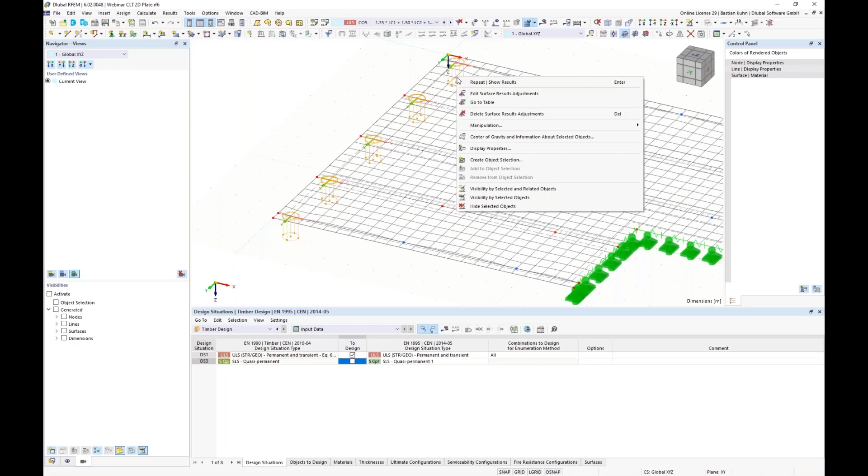So this and this. I'm just using grab and... what's it called? Grab and drag. Oh, I forgot it, sorry. So then I will copy these areas here. Let me take a look how many times I need to do that.

I wrote it, so 12 times we need to copy it, because we do have 12 supports in the X direction, with a value not in Y but in X direction of 4.5 meters. That's the span we have here.

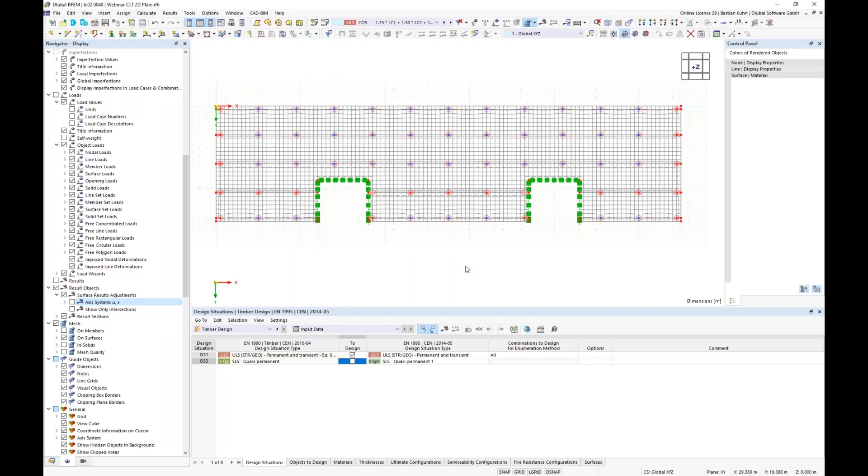So alright, go to that again. You see there's the axis system displayed for this. We do not need this, that's nonsense for our endeavors here. It also makes it not look that good. So we will switch the axis system off. And now we will calculate it again.

And as I'm sure that the design process for me is finished now, I'm also selecting the SLS design to be done, and go back to our homepage in order to give you the promised more theoretic explanations.

So one thing that I missed when I showed you the definition of the layer and the stiffness reduction was an explanation of how the factors for K33 and K88 are calculated. My colleague Gerhard, who's now answering all your questions, has a very nice Excel file here, which gives you the option to calculate these values. And of course, when we have a database for the producers, we will also use the factors that the producers are offering us, so you do not have to calculate that for all the setups in there.

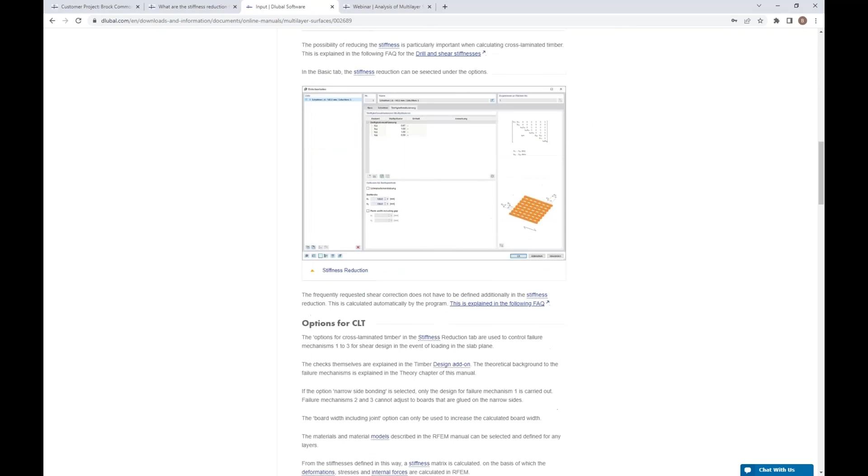The stress, actually, I wanted to show you later on. That's the online manual. It's not ready yet, I'm working on it, so there are still a few points missing. A lot of customers in Tuesday's webinar asked us, is it possible to display the stiffness matrix for the global plate? Right now it's not possible, but you can download a plugin tool on our homepage or in the online manual, and with it you can still see the stiffness in this example. So D11, that's the bending stiffness for this example in the manual.

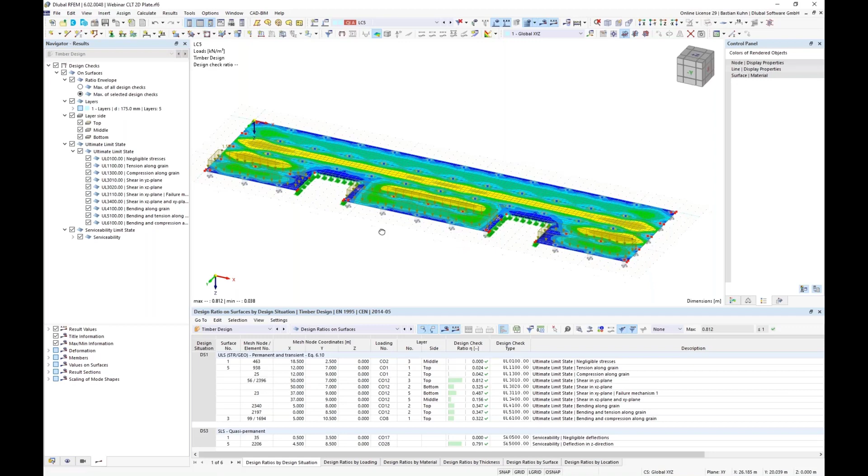In the theoretical world, you would have to define a live load in the first field from this point to this point, then this one should be empty, this one loaded, this one empty, and you need to do it in X direction and in Y direction. But for the sake of simplification of today's webinar, I just use, I only know the German word, a Schachbrett (checkerboard) loading. You can Google that. Therefore, I'm just using it in Y direction, not in X direction, because otherwise I'd have 10 or 20 load cases and the calculation time would just increase.

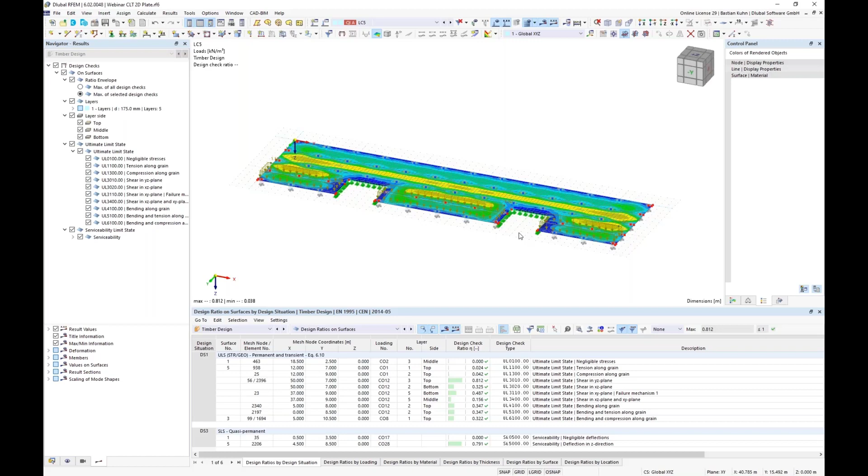You can compare it with a continuous beam. If you have 2 fields, you also have to introduce the live load on the left side and on the right side, because the highest force in the middle support will be with live load left side plus live load right side, but the highest field moment is with the load on the left side, if it is the longer span, for example. Okay, so I hope that's clear. Now we can take a look at the results, create a printout report, and we are fine.

Results good now. So the overloading of 1.1 has now changed into a loading of 0.8. Of course, you should make a finer mesh in here. If you look in here, you see that it's just smoothing over this area. But in general, that's how it can be done, how to regard the punching in here and how to avoid this overloading.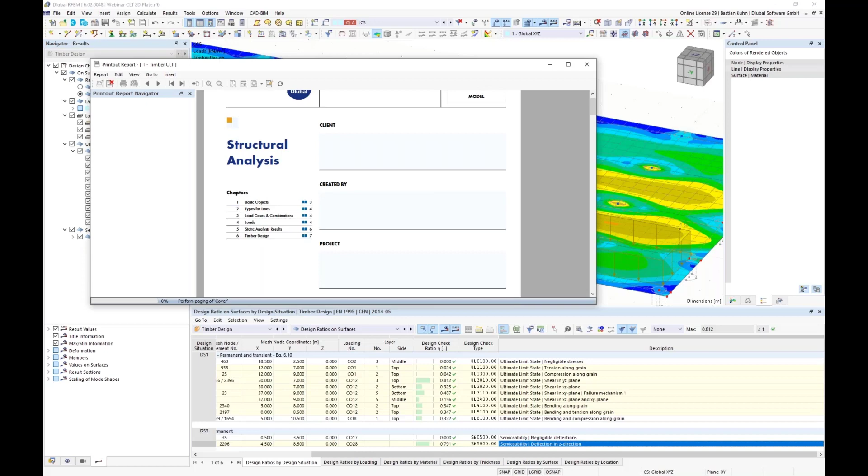And now we can open the protocol. I must see, it's somewhere on the other screen. There it is already, I think. Oops. Hold on. Yeah, there it is. Okay, now it's loading all the pictures into it. You see it on the left side, but yeah, as I said, it has been opened all the time.

And now it's printing the pictures of the load, the results of the lines. What else did we put into it? Details and stress verification. Well, we can take a look what is in there. Yeah, I'm not going into every detail, but into some details.

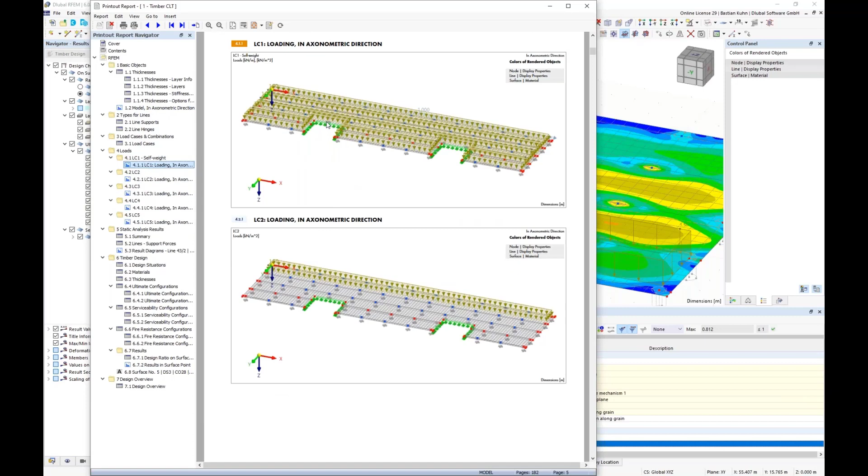So first of all, the good point is that for the documentation purposes, you have now the stiffness here, and you can write additional text into it, what was asked for quite often. Here's the model. Here you have the live load, the self weight. You have the live load of all these load cases. This result diagram we have in here, it's also quite nice to have for your analysis. This diagram is printed in here, and also the deflection of it.

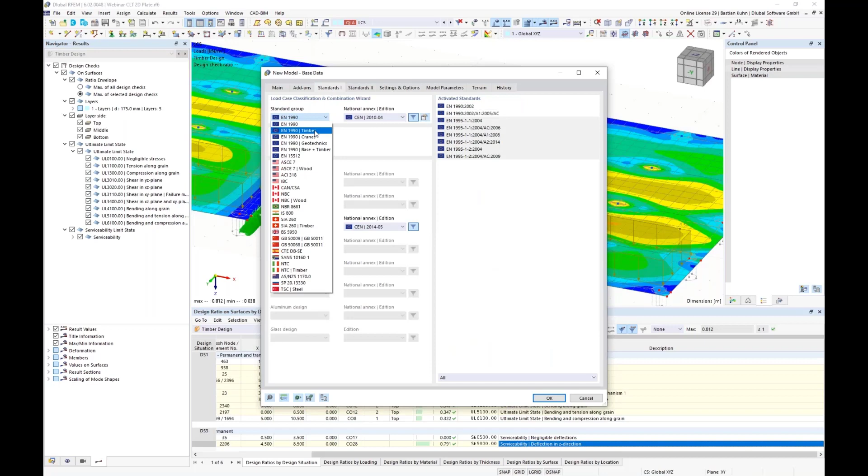Okay, that's the bigger model, and I'm now showing you a very small model which should take less than 10 minutes, let's say. We name it wall and say add-on multi-layer timber design as well. It's the same as I did before. And we take a very simple structure now, go into this other area and say here once again, we can now choose the material we have defined. It's already predefined, but of course, it's also the one I saved. It's the same material and just take it over.

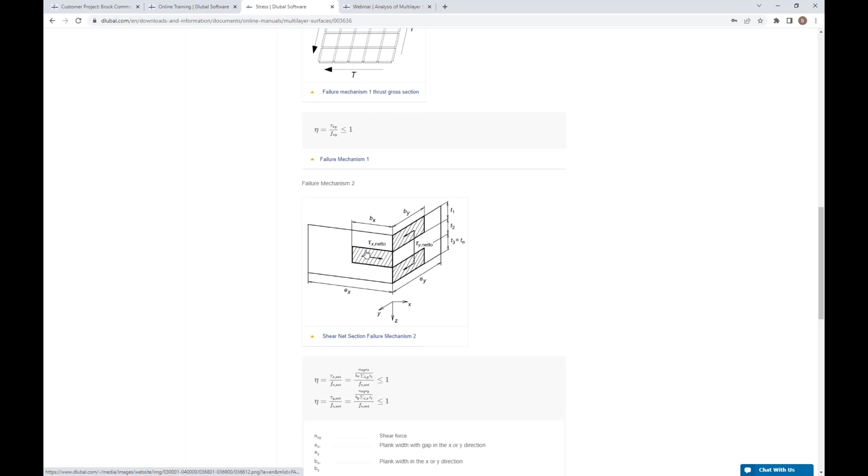Now stiffness reduction, I want to show you the difference. If you remember before, I only had reduced these factors here, but kept it glued at the narrow sides. Now, if I change that, it will actually do two additional verifications. And now the last time I have to switch to the home page and show you the stresses I just announced. So if you have glued at the narrow sides, it will only do the verification of, I don't know if the English word is really gross cross section, I have to look that up, but it will then not do the verification of the net section and also not of the torsion.

So if you look into these two equations here, you see that the width has quite a big influence in all the equations. And now we get back to the program. It would be possible to also include gaps, so that is also then regarded for the verification. Also for this, when we have the producer material databases, we will assign here the widths that the producers are giving us. In the standard for Austria, it is recommended to use 8 centimeters, but a lot of producers are also calculating with 10 centimeters, which is also okay, I would say. So default value will be 10, and you as a designer have to say what you are using here. But I would say if you use 10, you do not do too much wrong.

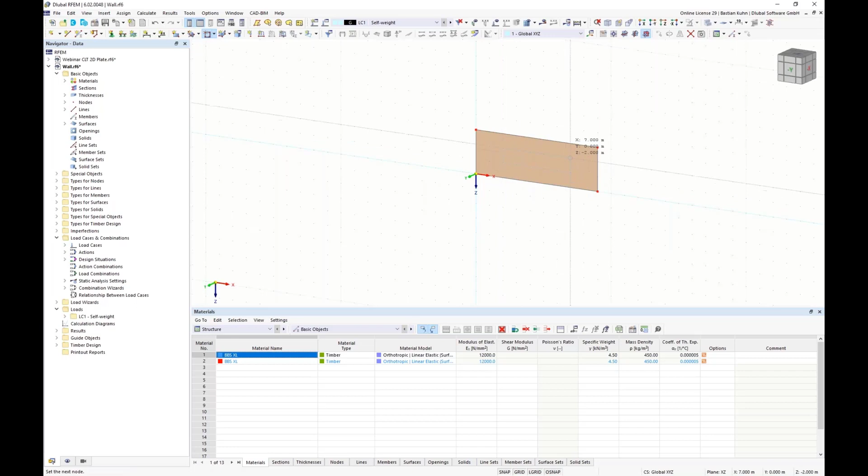So okay, we make it a wall, give it a little opening, assigned here by this, just to have it symmetric. Oops. And in order to see something there with the shear problematic, because that's the only reason I'm showing you this example here, we make it quite narrow here on the top. And because it is this narrow, I have to refine my FE mesh in order to have at least 2 elements over the height of this little spandrel in here.

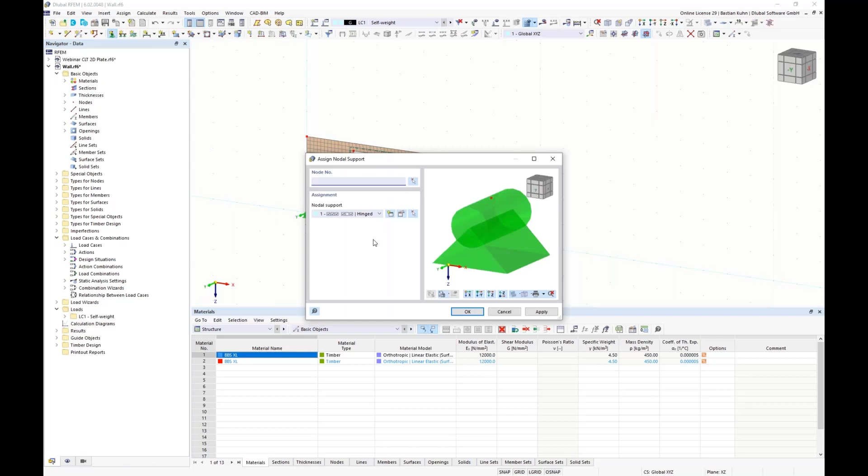We'll define a support on the left side. We'll just clamp it for the torsion, just so that I do not have to define so much more. And on the right side, I have to define a new nodal support, movable in X direction in here, and also give it some force on the top, and the force will be 2 kilonewtons, not per square meter, per meter. And then I also will define a live load.

Maybe the live load has to be introduced on the bottom because usually self-weight comes from the roof, but live load comes from the story. And that should definitely be higher than 2 kilonewtons. So let's say 10 kilonewtons per meter. All right. Okay, do a little combination.

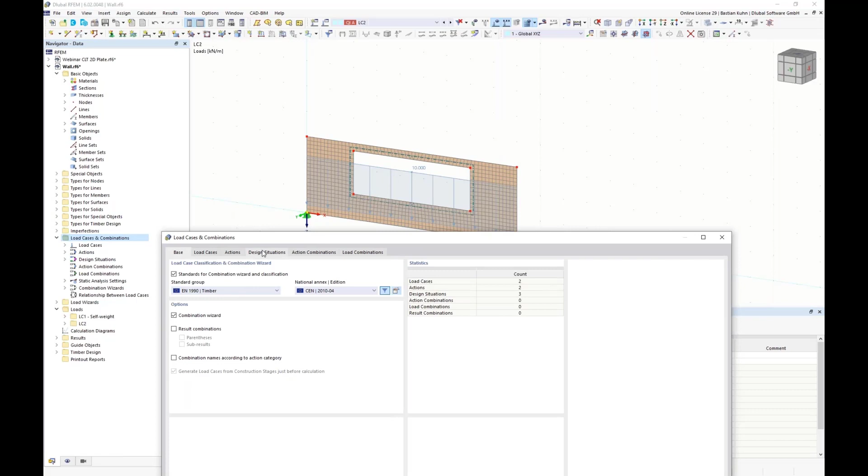Of course, I know you need to do a deflection analysis for this very narrow spandrel in here on top. But right now, I just concentrate on ULS, ultimate limit states. I'm not interested in this kind of deflection now. Of course, you could do that. And now I will calculate. Okay, here, these are the design configurations. We're also not concentrating on this, but just so you saw that they are still there.

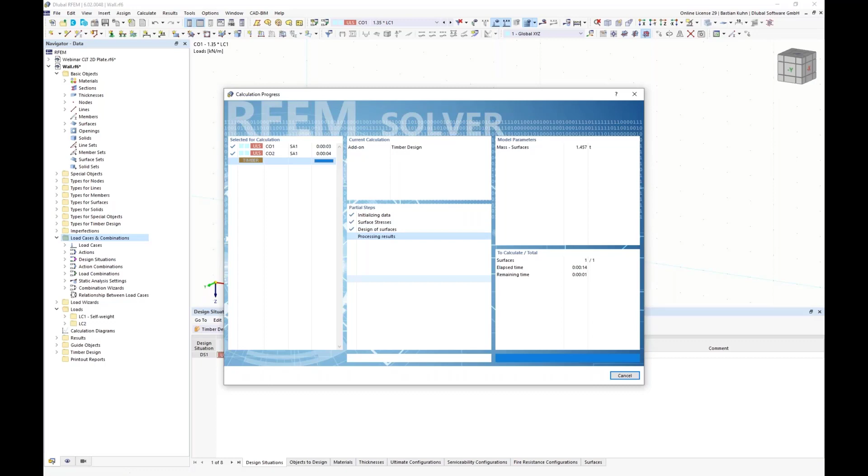And now we calculate the results of the timber. And now these two additional verifications are done. And I can show you the stress that is calculated for this. You see quite a lot of overloading. Why is that the case? Because I forgot to do the smoothing here on the bottom. So that's my fault. Sorry for that. I forgot it. And therefore you go to insert.

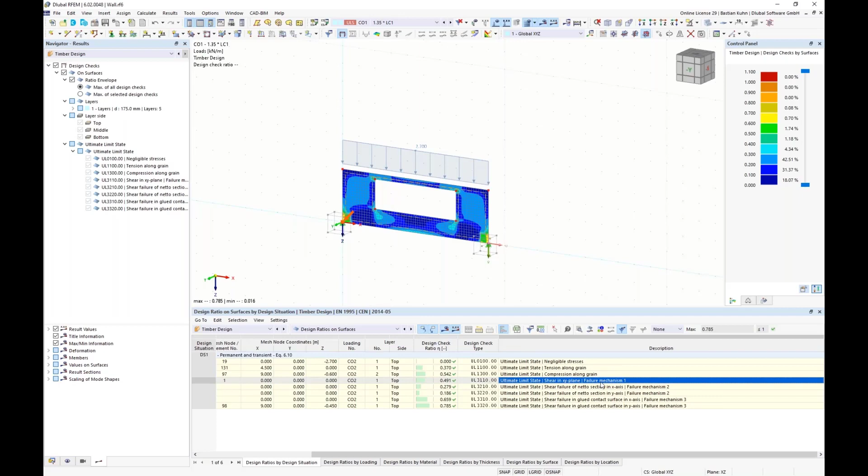And what I wanted to show you, so this is the verification we already had before. But now, additionally, we are also doing the verification of failure mechanism 2 and 3. I think 3 is the more interesting verification. I don't know, that's really just my personal feeling. So you see in here in the details that you have the torsional shear stress of this value, and we are also additionally doing shear stress in X and Y direction. But you see that the introduction of this is very, very low.

So the basic point of it definitely is the stress of the torsion. Okay, tau X, that's here. Of course, it's constant over the whole section. That's always the case for this kind of stress. And here you have it in the net section, which is failure mode 2. Okay, good. To me, it all worked quite well.